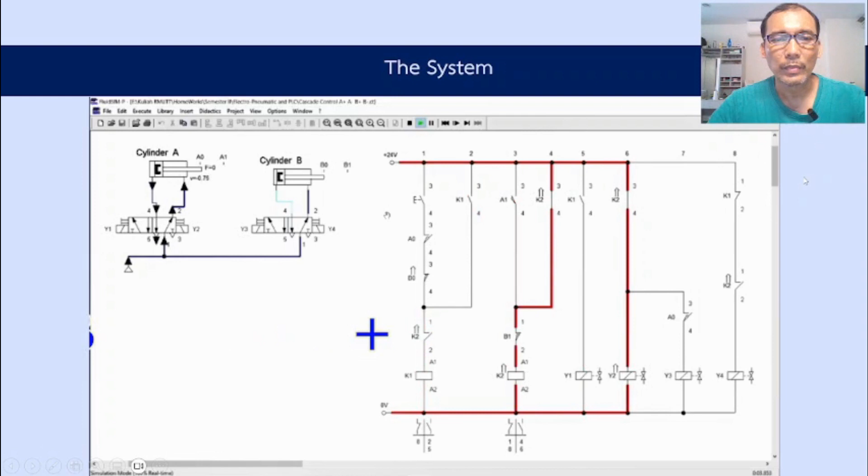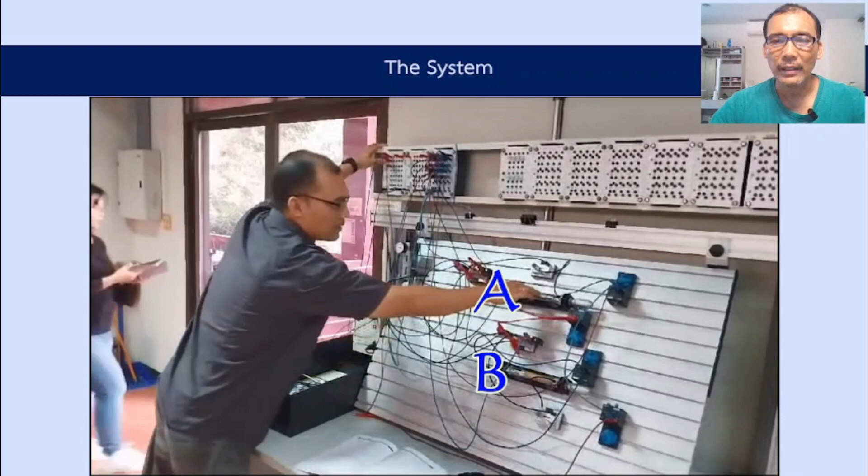Okay, in order to build the same understanding, I would like to show a movie about the system work. So this is the simulation using FluidSIM to perform a movement A plus, A minus, B plus, B minus of two double-acting cylinders. So here we have a pneumatic system and also electric system. And then after we have it, we can apply it to a real pneumatic system.

Okay, first of all, we have to do the signal flow diagram to perform the movement A plus, A minus, B plus, B minus. Here, we have the precondition, which is the start button as the main component to perform the movement. And then we have also A0 and B0, the sensors that we put at the minimum position of those two cylinders. It will represent the position of the cylinders.

So it means when we need to start the process, we have to make sure that all cylinders are in the minimum position. And then here we have the output A plus, A minus, B plus, B minus, and then at the bottom we have the input: Start, A0, B0, A1, A0, B1, B0. These are the sensors.

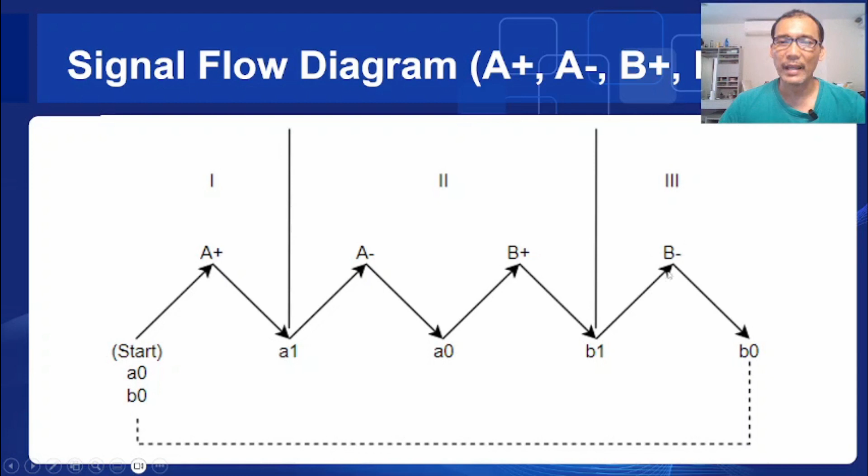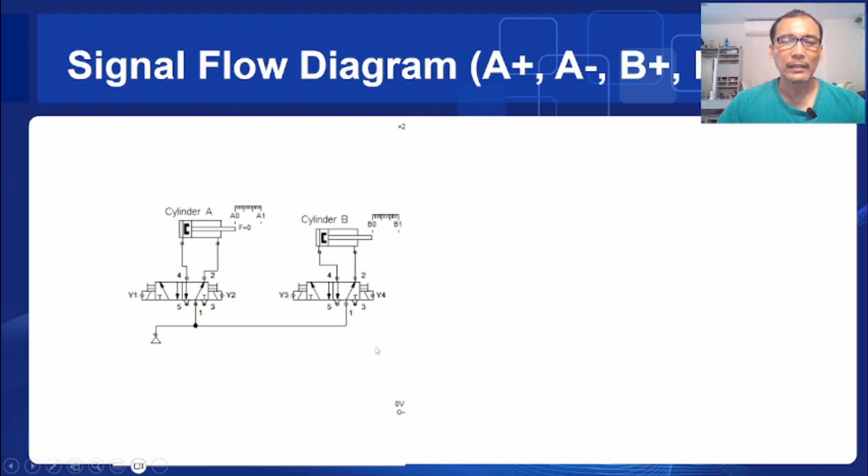And then after we have the signal flow diagram, we can go to create the electro-pneumatic system. First, we have to make the pneumatic system, and then we can continue to create the electric wiring. Based on the signal flow diagram, we can make this electric wiring by following this pattern. So we have the first latching circuit here with the output relay K1, and then a second latching circuit with the output K2.

And then the next ladders will go to group 1, group 2, and group 3 according to the signal flow diagram here. So in group 1, the output should be A plus, or the component that will make cylinder A move forward. And then group 2 should perform the movement of the first cylinder to the minimum position, and then the second cylinder to the maximum position, or A minus and B plus.

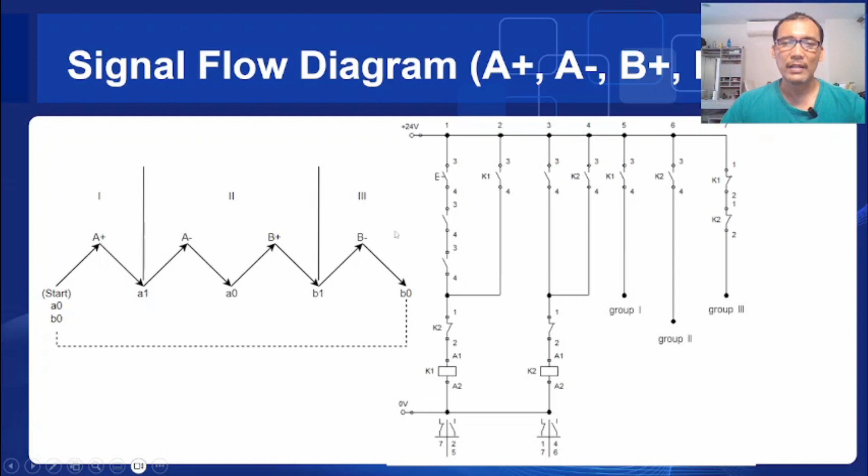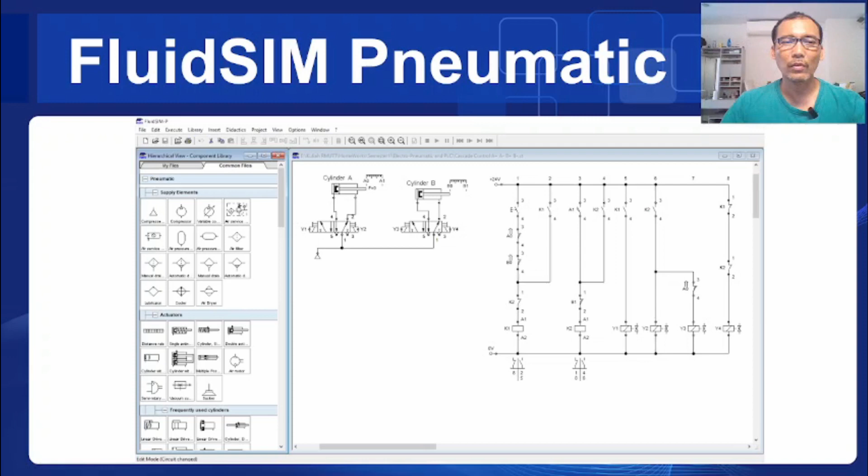And then the third group, or the last group, should perform the movement of B minus, or the second cylinder moving to the minimum position. So after that, we can continue to create this whole system in FluidSIM pneumatic first before we apply it to the real system. Okay, we can continue to FluidSIM pneumatic.

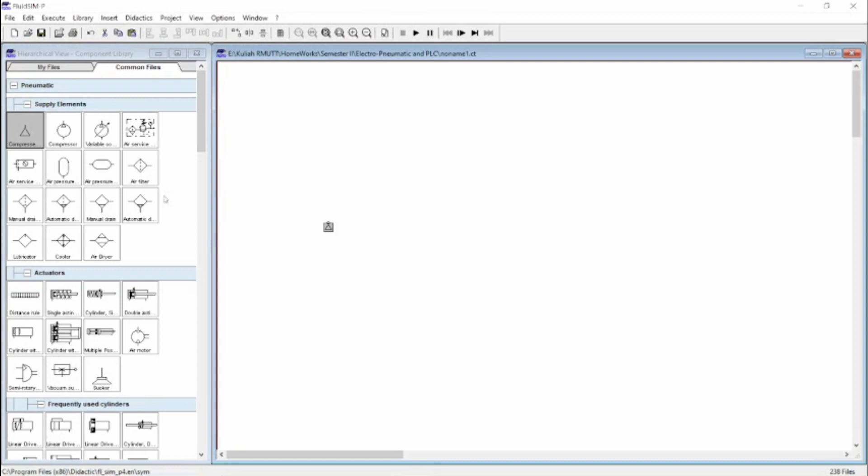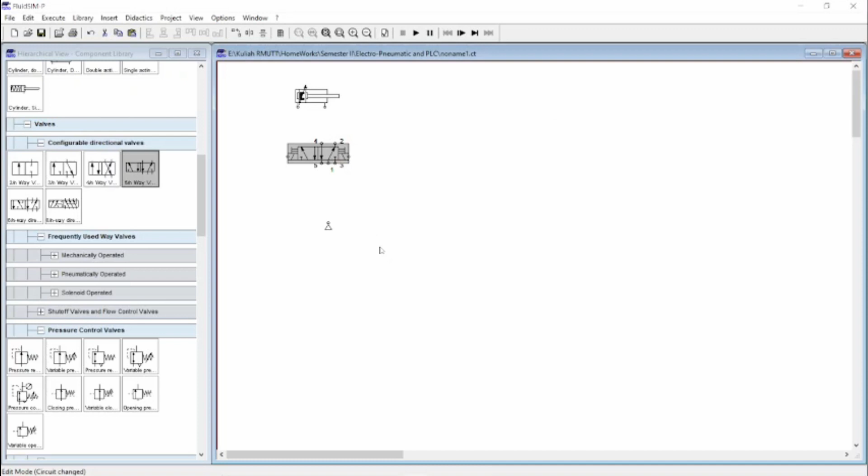So here we can continue to create the system in FluidSIM pneumatic. First, we have to create the pneumatic system. We can put a compressor here and then a double-acting cylinder, and we have a valve, and then set the valve to be a double solenoid valve. And then for the cylinder, I will set the length to 1000, and then for the actuating label set A0, A1, the position is 0, and here 1000.

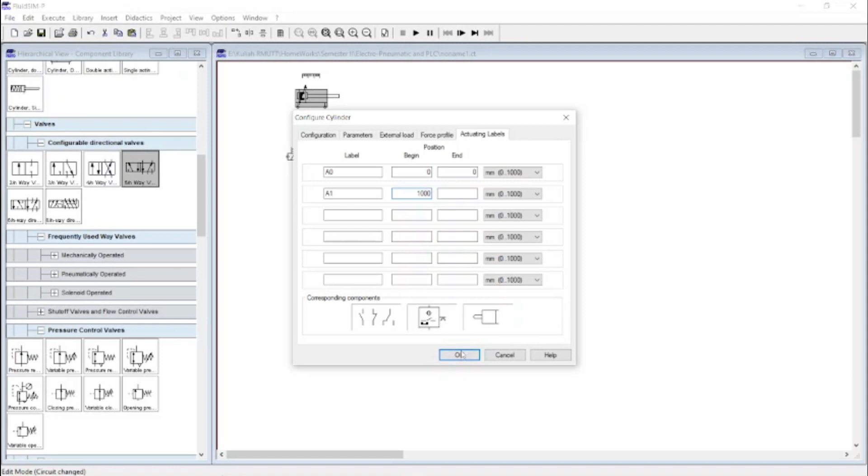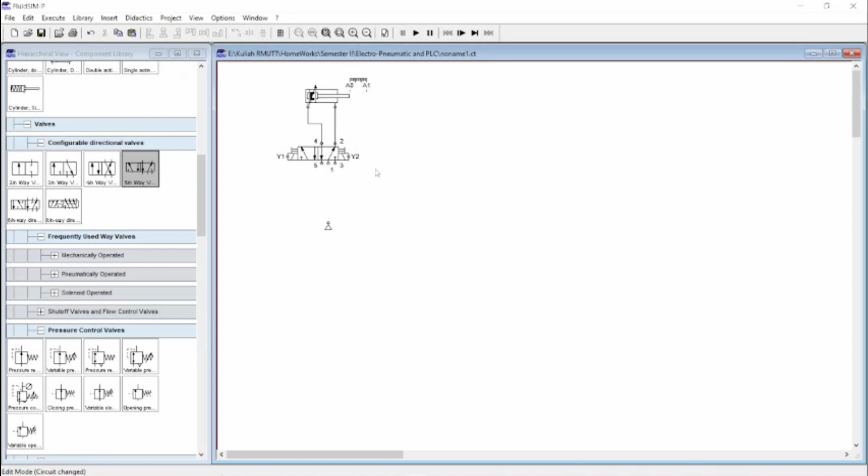Okay, and we can put a label here. This is Y1 and the other one is Y2, and then we can connect the cylinder to the valve, the directional control valve. This is a 5/2 directional control valve. You can put a terminator here as the silencer so that there will be no leakage in the system.

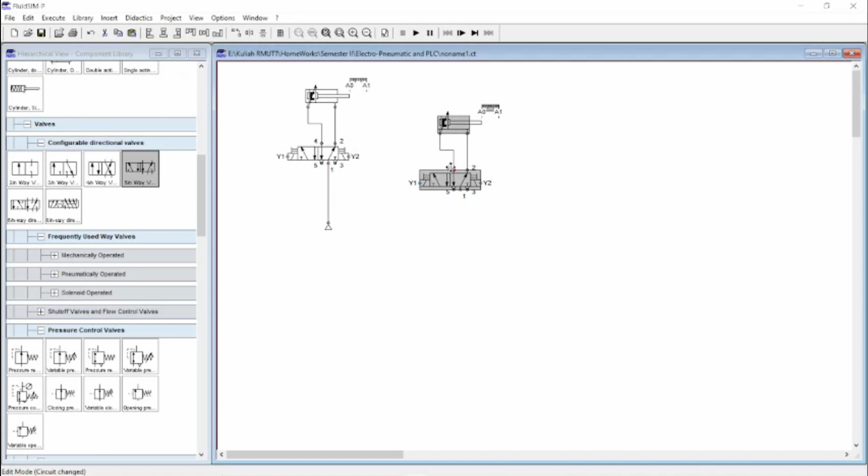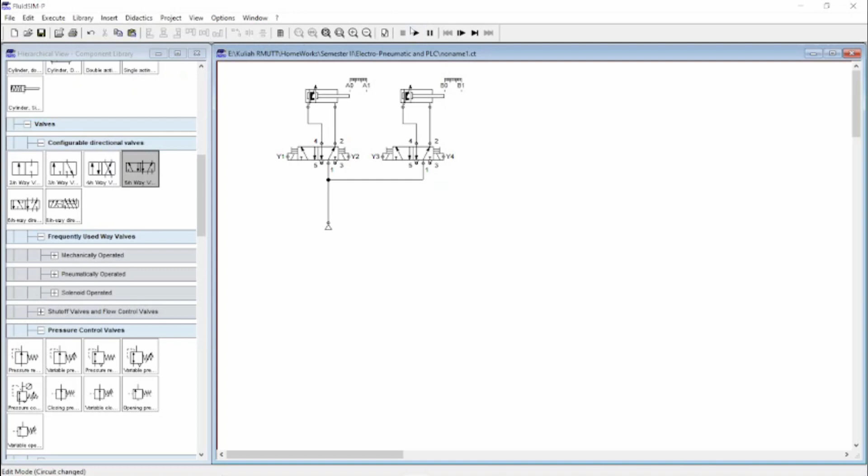And then we can copy this one and change the label as needed. This is Y3, and this one is Y4, and here is B0 and B1. Then you can connect this. Okay, our pneumatic system is ready, so we can check. Okay, it can run properly. Here also it runs properly. Yes. Okay.

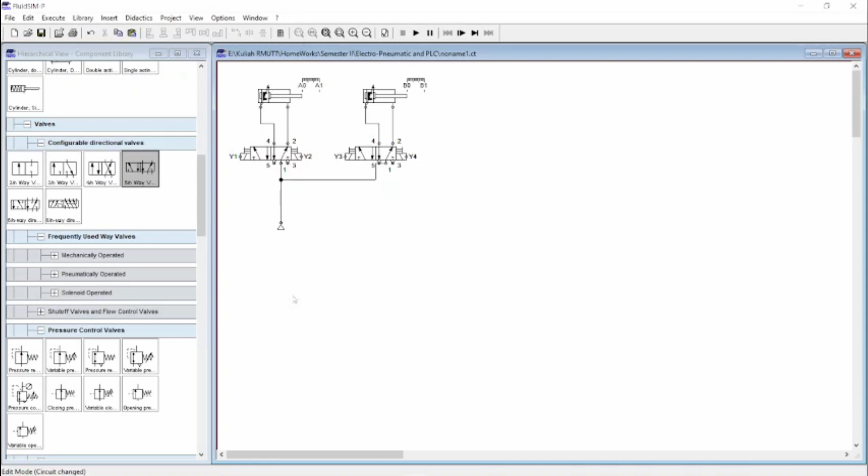Next, we can continue to create the electric system. So here we need the power supply. We can put here 24 volt and 0, and then we can create the system based on the pattern that we have. This is the push button as the first input or the main input, and then after that we can put a preconditional input,

and next we will have a normally closed contact as the reset contact for the latching. So this is the latching. Okay, so we can put the label here. This is start, and this one is K1.

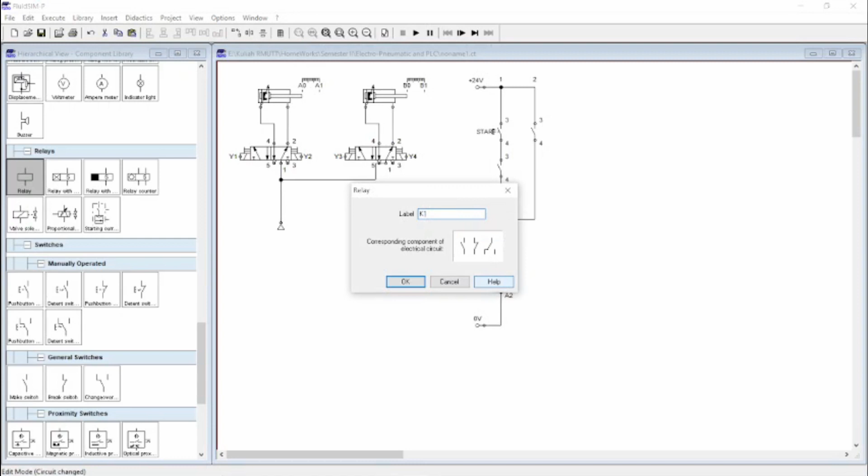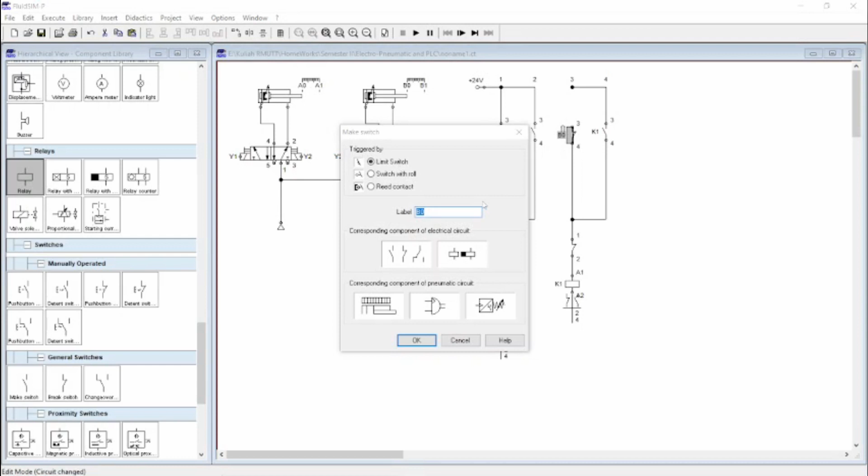So here is the contact of K1, and for the precondition this one will be A0 and B0 to indicate that the cylinders are in the minimum position. So for the next ladder, we can copy this one, and then we can eliminate the contacts as needed. Here we do not need to put start, and also here we need only one contact. This should be K2, and this one should be K2 as well.

Okay, this is for the second ladder, and then we can follow the pattern to create the ladder for the first group, the ladder for the second group, and the ladder for the third group. For the first group, we need only a normally open contact here. And then for the second group, we need one normally open contact as well. Later we will put the label. Now we prepare first.

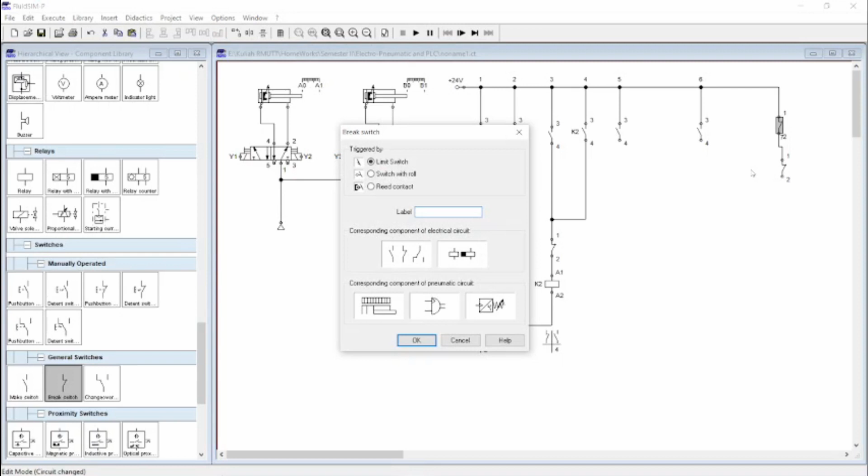Okay, and then the last one, we need to have two normally closed contacts. And then this will be K1 and the other will be K2. Okay, now we can continue.

Based on the signal flow diagram that we have, here group 1 will be used to make a movement of the first cylinder forward. So in order to make cylinder 1 move forward, we have to activate solenoid 1 or Y1. So we can put here the first solenoid, solenoid 1, Y1 here. Okay.

And then the input is K1. So here should be K1, because when we press the start, this row or this ladder will activate the K1 relay. So all the contacts should be activated as well. And then this will give an effect to the system and make cylinder 1 move forward. So here Y1 should be activated by the K1 contact.

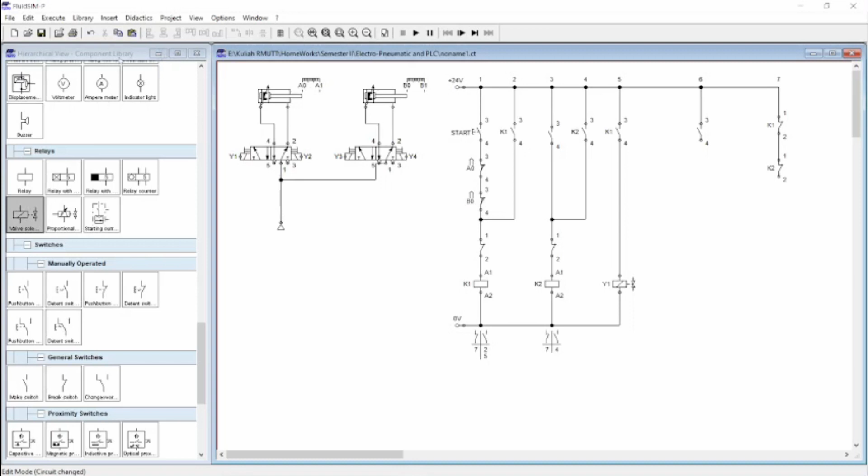So we can try. Okay, this one is okay. Yeah, we can try. Press start. Okay, the first cylinder moves forward until it reaches A1. So here, when A1 is reached, it should make the cylinder move backward to minimum position. So here, this contact should be the A1 contact. Now we can put here A1.

And then, according to the signal flow diagram that we have, in group 2 here, we have two outputs and two inputs. The first output will make cylinder 1 move backward. So here we will put the second solenoid, we will name it Y2, and then the third solenoid we will name it Y3. So here we can connect this wire or that contact to Y2 here.

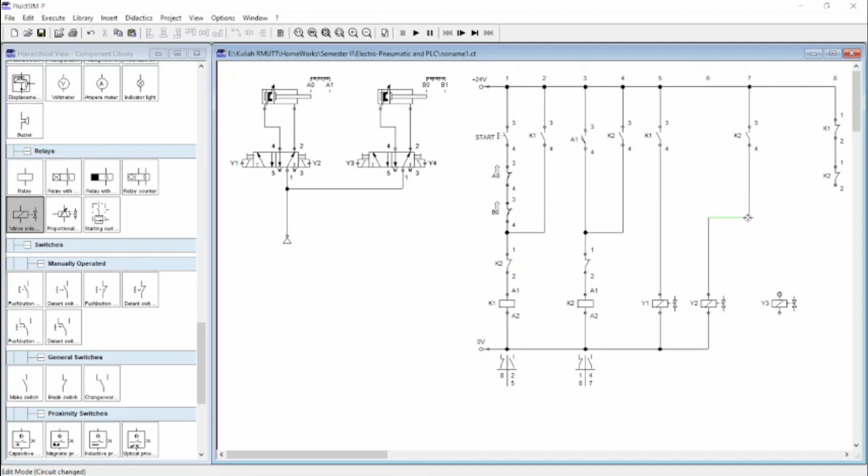Next, after cylinder 1 is in the minimum position, we have to activate Y3. So here Y3 belongs to group 2, or B+. And according to the signal flow diagram, this ladder belongs to group 2. So it means we can connect this solenoid to K2. But if we connect it in this way, then Y2 and Y3 will be active at the same time.

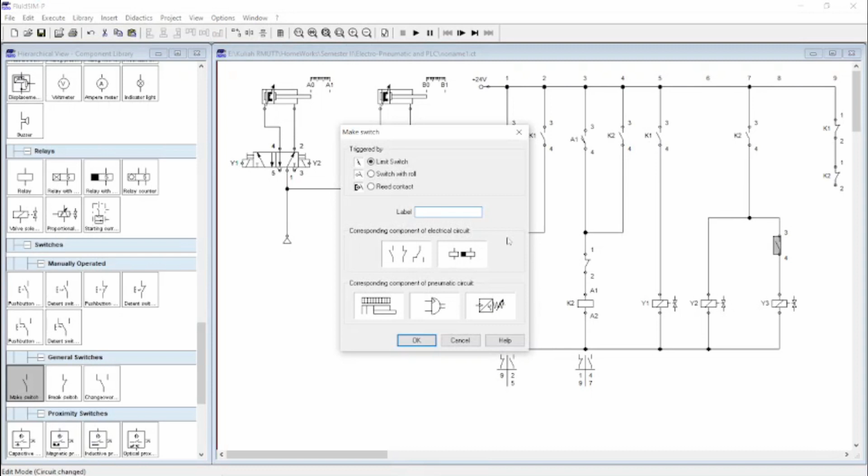So this condition is not the condition that we want, because from the signal flow diagram, we need to wait until the first cylinder reaches the minimum position, and then after that Y3 is active, making cylinder 2 move forward. So here we can put a breaker. We can put a normally open here and name it A0. So this rung can be activated after A0 is active, or cylinder 1 is at the minimum position.

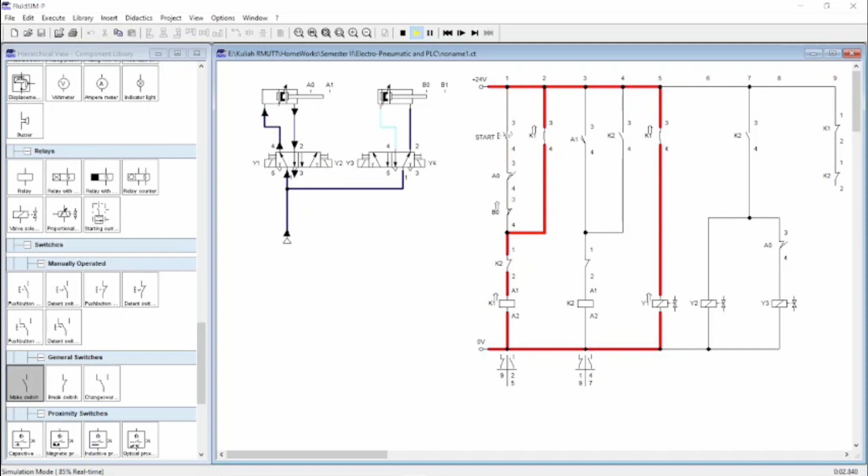We can try again. Start, move forward, maximum, move backward, minimum, and then cylinder 2 moves forward. Okay, now we still need to complete the last ladder. So here in the last ladder we need to put one more solenoid and then connect it there, and here connect it to 0. This is Y4.

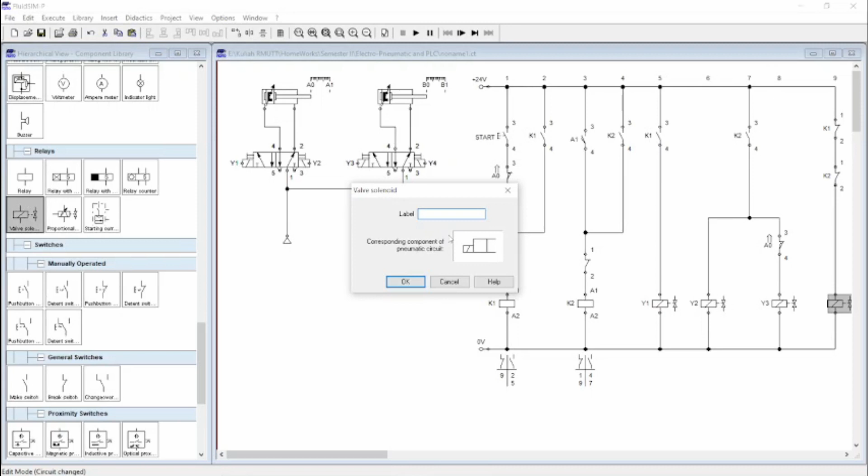Move forward, move backward, move forward, and then here the last ladder will not activate because Y2 is still open. In order to close Y2 here, we have to deactivate this ladder. So here we have one normally closed contact. This contact should be the B1 contact, because this is the last state. The last state is the cylinder touching the sensor B1. We can put here B1.

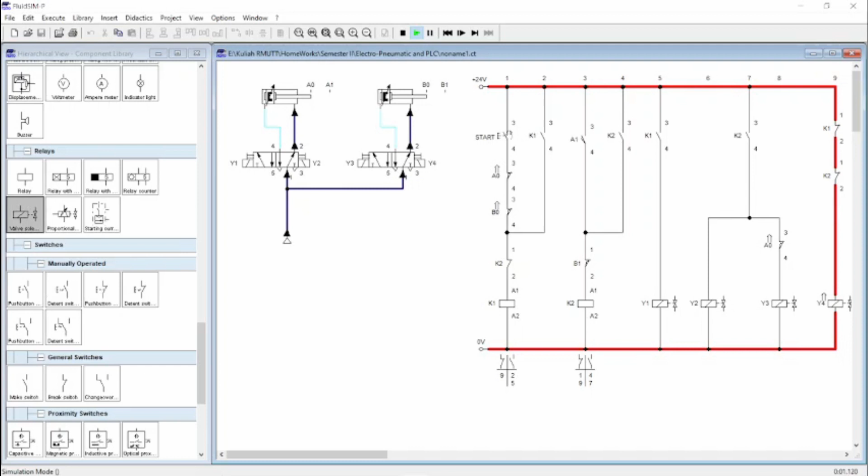Okay, and then we can try again. Cylinder 1 moves forward, maximum, moves backward, minimum. Cylinder 2 moves forward, maximum, and then backward, minimum, and reset. So we can start again, and the system will show the same movement: A plus, A minus, B plus, B minus.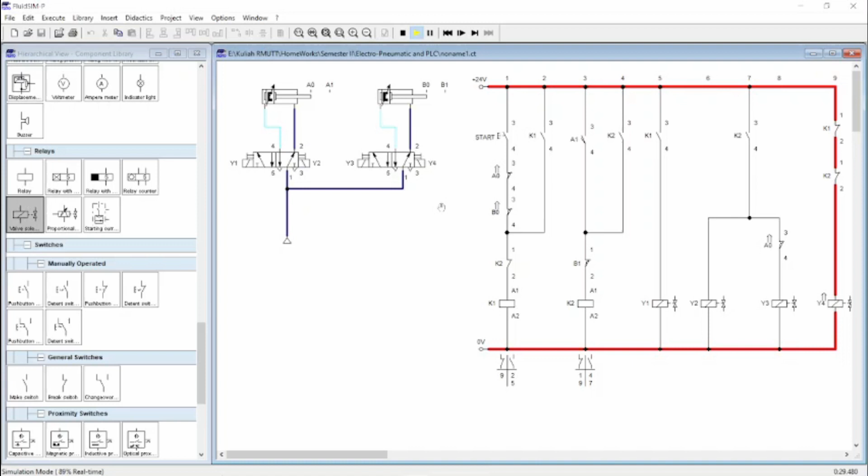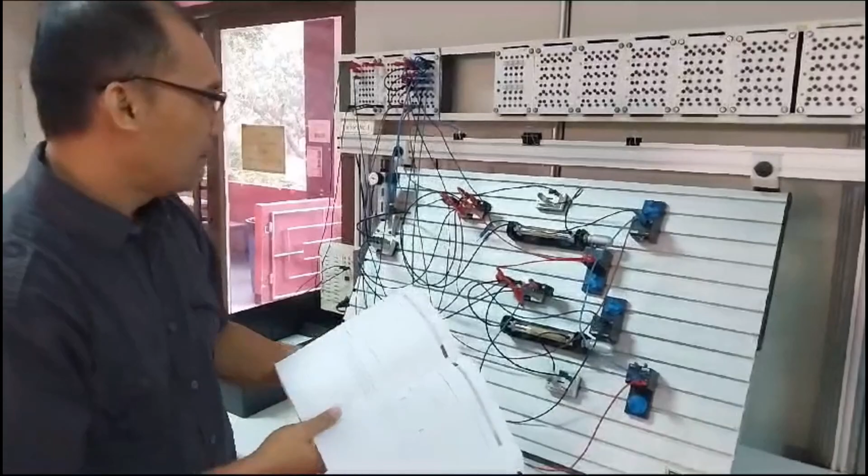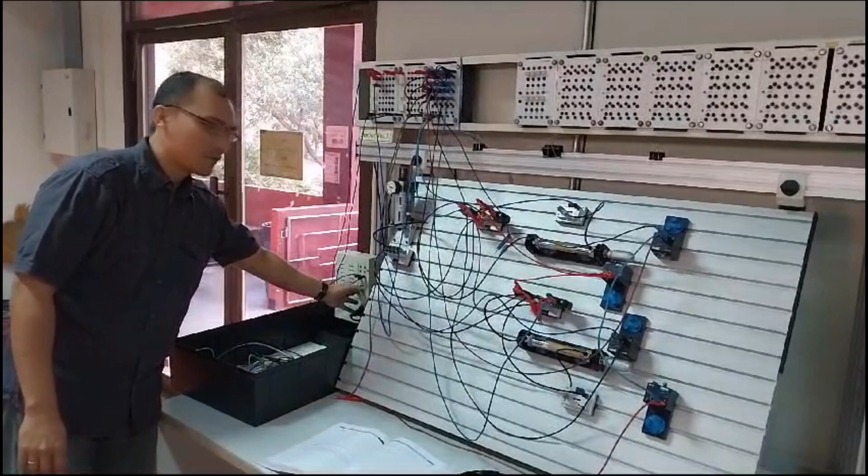Okay, after we have this circuit, then we can apply this electrical circuit to the real pneumatic system. We can apply it to the board, and this is the wiring system. We can try. First, we have to turn on the power supply, and then open the air pressure, and when we press the start button, the cylinder will move forward, and then go backward directly, followed by the second cylinder moving forward and going back to minimum position.

Start. Okay. Forward, backward, forward, backward. Okay, this is the electro-pneumatic cylinder system A plus, A minus, B plus, B minus.